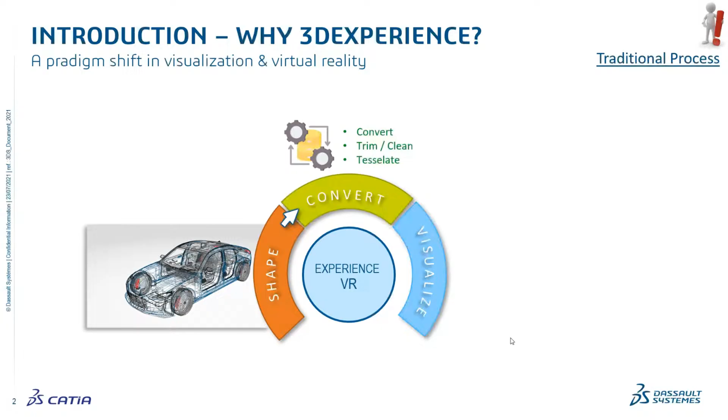So this is a very simple diagram of the traditional process. In the beginning, we have some sort of 3D data coming from a CAD software or modeling package whatsoever, and we want to visualize this data. In order to do that, we need to convert it, which means we need to transfer the data structure from one to another. We need to trim, clean, tessellate. So we need to turn the data into something that the visualization engine can digest. And when this process is done, we can finally visualize our experience in VR.

Then we do our review, we find some issues, information goes upstream back to engineering, design, manufacturing, whatsoever, modifications are made, and the whole process starts over again.

There are a few drawbacks with this approach. First of all, it needs an expert to configure the data conversion part. This is not an easy thing, and it's really tricky to match material stuff and stuff. And if some module in the pipeline changes, say there is an update to some software, it needs to be corrected accordingly. So the process itself can take a very long time to accomplish, depending on the size of the model. If you imagine a complete cruise ship or a passenger plane, it can take hours or even days to be ready for visualization. And consequently, at the time the model is reviewed, it might already be outdated.

And last but not least, usually there are no features taken into account besides geometry and material. So maybe you will also get some cameras and lights, but that's it. And what you get is not even a copy of your original data. It's a dumb model, this is what I call it, or it's a lookalike thing. So it doesn't know its context, it doesn't know its constraints, its kinematics, or any other properties.

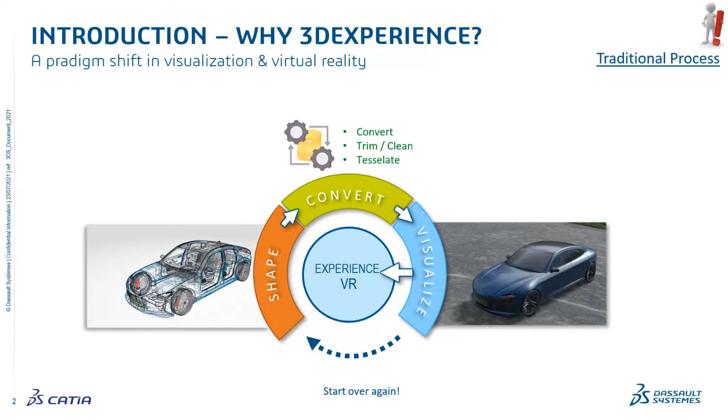This list goes on, and we'll see shortly how we overcome these drawbacks with our integrated approach on the 3DEXPERIENCE platform. But here is how the process looks on the 3DEXPERIENCE platform.

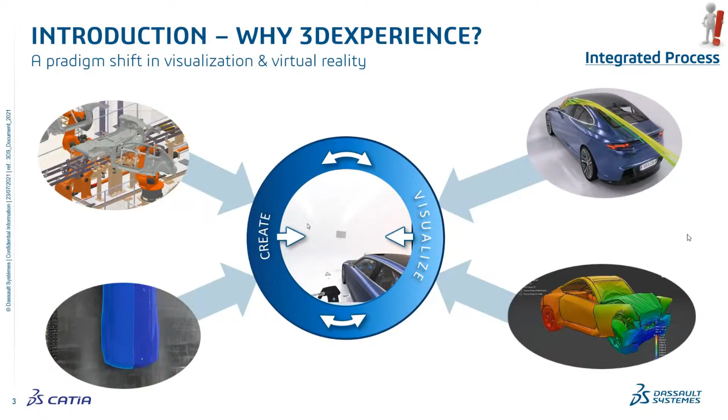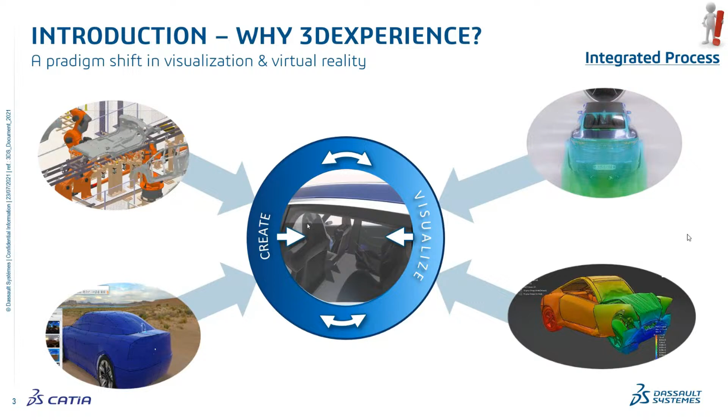No data conversion or special preparation is needed. We can instantly review native data, whether it's CATIA, Delmia, or a Simulia app. XR is built into the very heart of the platform, and it's available in almost every 3D app. And because we're looking at native data, content is not restricted to geometry. It can be kinematics simulation results, or material flow simulation of a factory layout. We can even combine data from different sources into one presentation.

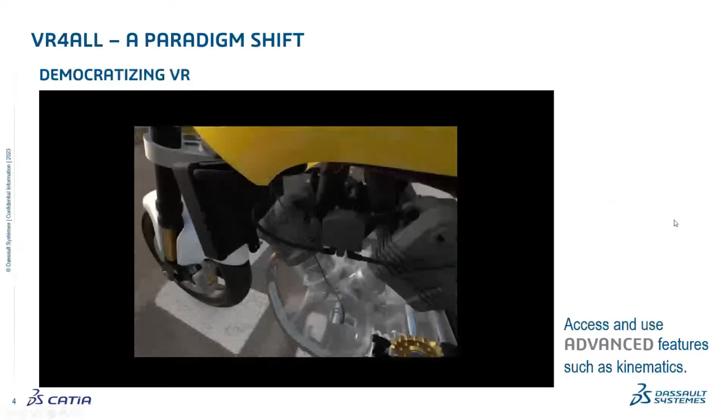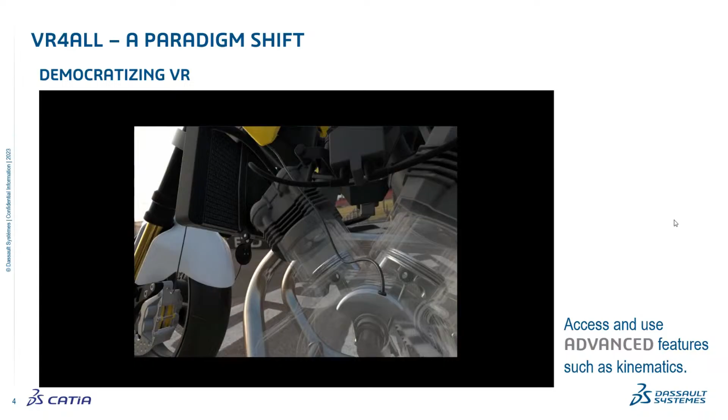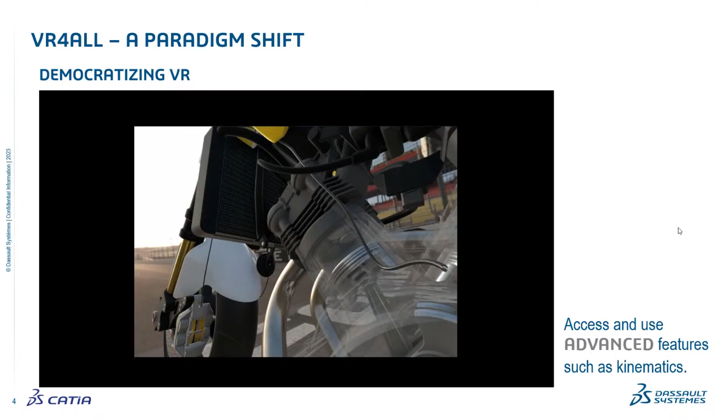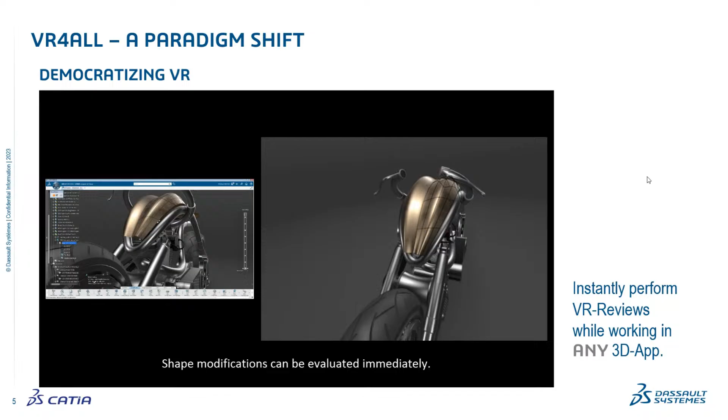See later on, here are some examples. The first one shows native CATIA kinematics in action. Usually with a traditional tool, you need to create these animations, define the constraints, and so forth - lots of work. But here in the 3DEXPERIENCE, we just play the kinematics that were defined by engineering and which are part of the CATIA product. And if you start a VR review, you will experience the current version of your dataset, not an outdated lookalike. You can even modify the data while the session is running, like shown in this video. Here, the surface of the tank of the motorbike is modified, and these modifications are shown in real time in the running VR session.

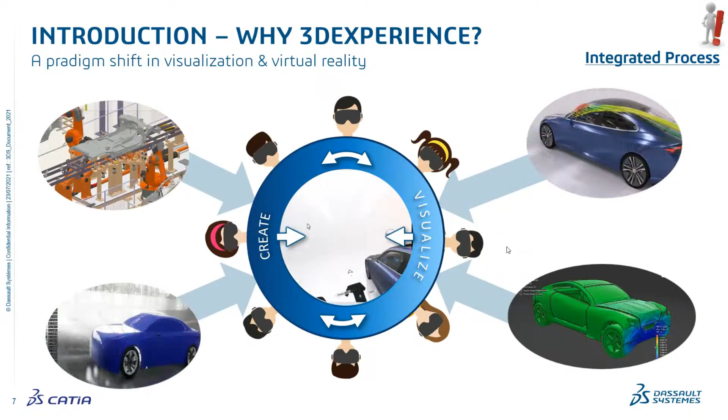And then you mentioned the second advantage earlier - what is this second one? The second advantage is not as obvious, but if you imagine you're using visualization in a larger context, like in a big design studio, it becomes a crucial factor.

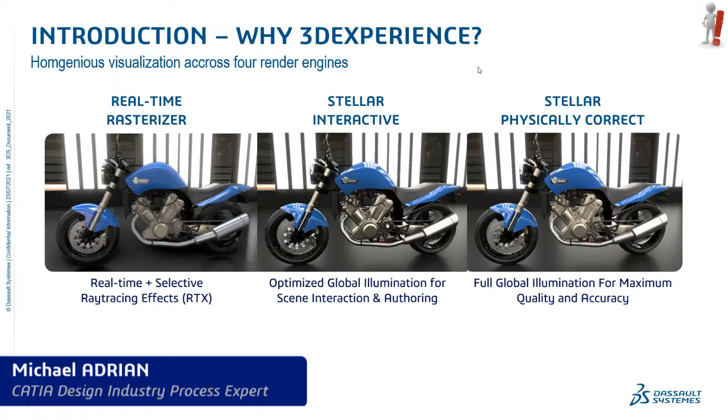It's all about materials and how they are displayed in different render modes or in different render engines. Because even if you load the same material into different tools, it is not guaranteed that its appearance is consistent across these tools. That's because of the way the material is handled internally in the engine. It's a bit like shooting the same image with different cameras - even if you set the same parameters and use the same lens, you will never get the exact same results.

So on 3DEXPERIENCE, as shown in this slide, we have three different render modes, tailored to different use cases. There is the real-time rasterizer for interactive rendering and XR. There is Stellar Interactive for real-time ray tracing for quick examination of lighting, reflections, and refractions. And there is Stellar Physically Correct, or Stellar GI, for high-end ray tracing and global illumination. There's a fourth one, WebGL, for 3D real-time renderings on web-based clients, but this one's not listed here.

And here comes the advantage: not only can you easily activate the render mode that fits your need by a mouse click, but the material model on the 3DEXPERIENCE platform ensures that every user will get a consistent look independent from the currently selected render mode - of course, within the boundaries of what is technically possible in that render mode.

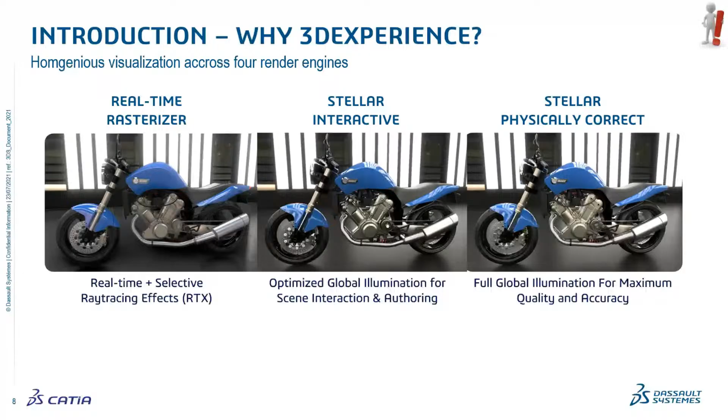Let's see this nice side-by-side comparison where you get Real-Time Rasterizer on the left, Stellar Interactive in the middle, and Stellar GI on the right, the same thing with a moving camera. By the way, the noise you see on the right part of the screen comes from the way it's rendered, because it's ray tracing, and when the camera is moving, the engine just doesn't have enough time to calculate the complete image. But as soon as the camera stops, the AI denoiser kicks in, and the image becomes clear rapidly.

Okay, so these are my two favorite advantages - they are really nice advantages. Also, something really important when it comes to VR and even augmented and mixed reality is headsets. So what HMDs are currently supported on the 3DEXPERIENCE platform? What you see here are the headsets that we support. For VR, the HTC Vive is more or less our reference model.

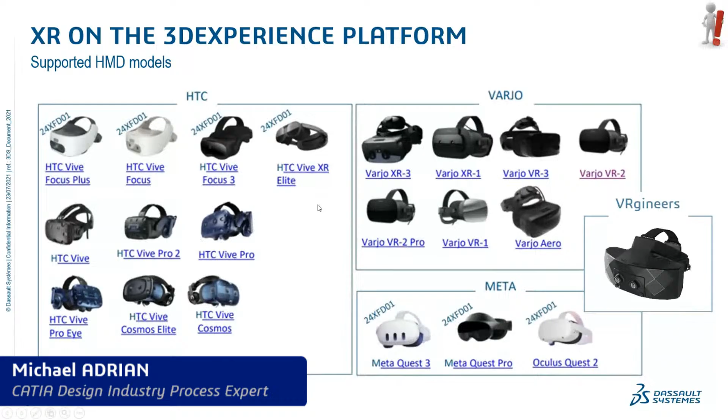And for mixed reality, it's the Varjo XR family. But the other headsets you can see here are also supported. Controllers might work a bit differently, but basically you can use each of these headsets together with HTC, for example with SteamVR, or the MetaQuest with whatever software it uses. I've never used the MetaQuest, but it works in a similar way.

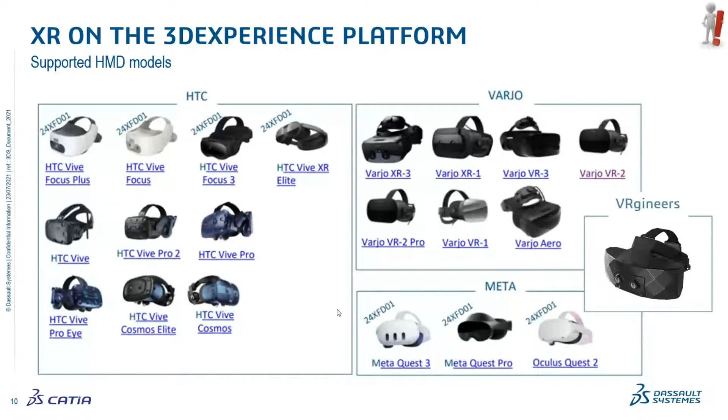So you start your standard VR software, and in parallel you run the 3DEXPERIENCE platform. As long as these headsets talk OpenXR, everything's fine. So that's the current state with HMDs.

Okay, and also I know that some more advanced setups exist, like Powerwall or Cave. Can you say a few words about it?

Yeah, we are supporting Powerwall and Cave setups out of the box with the 3DEXPERIENCE platform. There is no additional software needed.

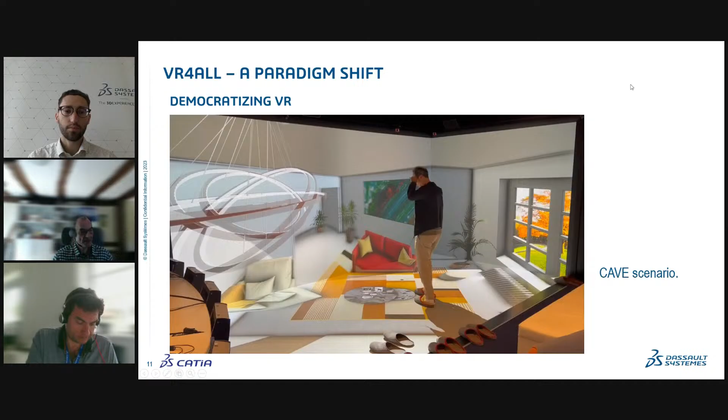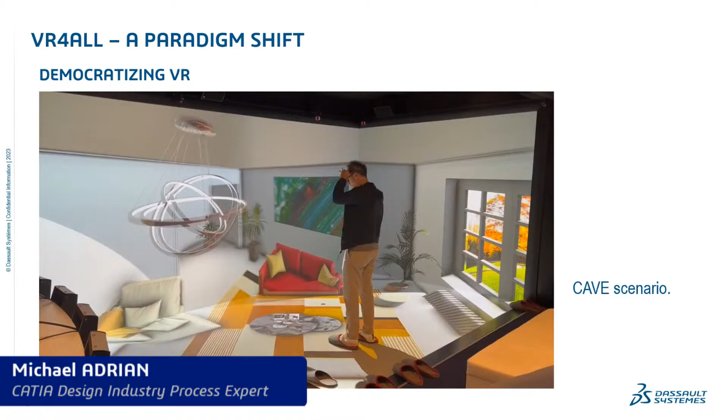Here is a nice little video which was done in the Lives Cave in Vélizy, our headquarters, showing a living room scenario. And again, this is native CATIA data. It's the same as with HMDs. There is no preparation; the only difference is instead of clicking the HMD command icon, you click the Cave command icon.

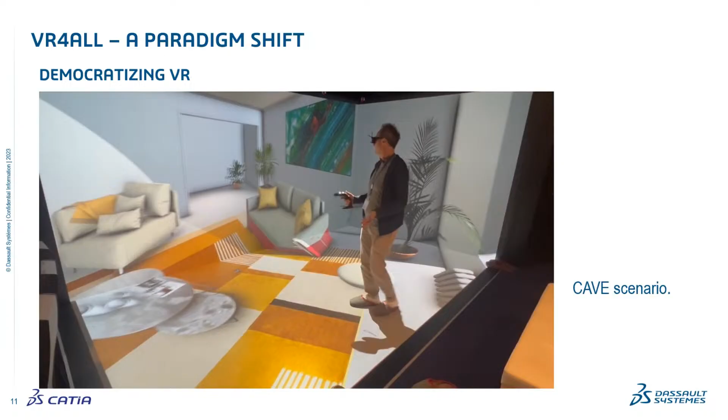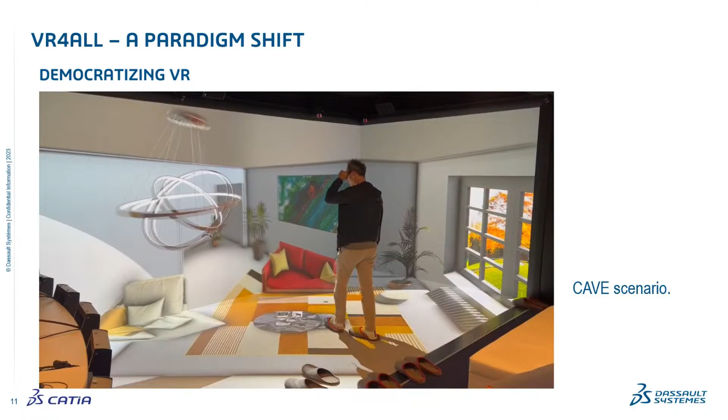Of course, these things need to be configured. It's a bit tricky, always depending on the hardware. This is not plug and play, but we can offer some support for the configuration. So if you have questions about how you can use your setup with 3DEXPERIENCE, please let us know, and we will help you with the configuration.

All right, so thank you for this great overview of VR capabilities. Now maybe let's put it in context. You said you can show us how easily you can use VR in CATIA. So can you show us an example of this usage?

So I prepared a little demo. I don't want to give you a full demo, just want to show how easy it is to start VR. So what you see here is a native CATIA app on the 3DEXPERIENCE platform. In this case, it is CATIA Live Rendering, but again, it can be any 3D client on the 3DEXPERIENCE platform. At the bottom here, you can see there are different tabs offering the features in this app.

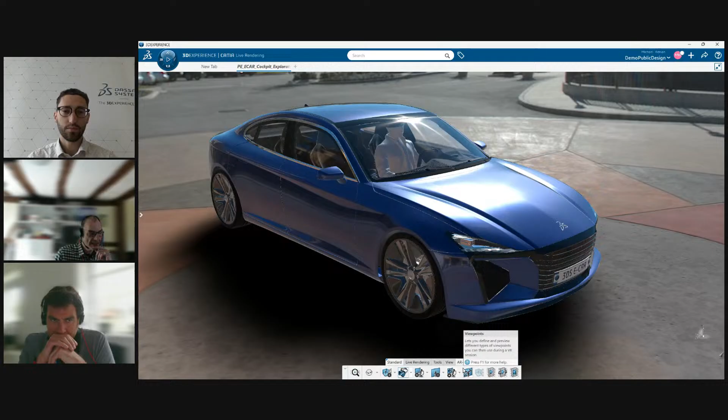And one tab that you have in almost every 3D app is the AR VR button. Here you can see we've got Powerwall, Cave, HMD, and some other scenarios. I want to show you how easy it is to start a VR session.

In order to do this, I need to switch my equipment. I have my XR Elite besides me. Cross your fingers, everything works as planned. Only little problem is I can't talk while I'm wearing the headset, because for whatever reason the microphone doesn't work. So Ugo will talk you through this quick demo while I switch my equipment back in a minute.

All right, so while Michael is doing this VR demo, as he was explaining, we have here a native CATIA model. It's not showing the CATIA tree on the left, but we have the original data with all the mathematics. And as you saw in some videos before, if you do some modeling change, you will get it on screen, but also into your VR headset.

So with the AR VR tab, he goes into HMD configuration, picks the HMD connected, and then the platform will automatically communicate with the headset and with the software providers. Could be SteamVR or Varjo based, depending on the hardware, the headset you use. So then it just activates the HMD commands, and this is what he sees into his headset. You can at the same time see on screen the model and see with a VR view what he's experiencing into VR.

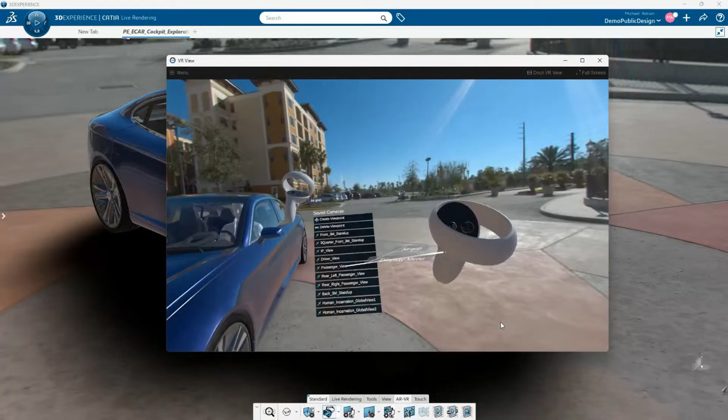The first one is called navigation. We have Product Explorer, but also cameras. So let's see which one he will pick. He starts with cameras. You see here we have predefined cameras that you can configure exactly with the right coordinates.

And this camera can be called on the fly with this interface which is attached to your controllers. So if you want to define a design review while standing beside the car, at the exact position of the driver or the passenger, this is something possible. And then you have this way of exploring.

By the way, if you want an advanced scenario, we can do some seat buck alignment using trackers.

So what you see here is starting to navigate. We have three ways of navigating. The first one is to walk, meaning you keep the same height. But if you use the two controllers, you have also a different way by air grabbing, which means you can rotate, go up, down, or move.

We also have the fly mode, which gives you all the freedom to navigate upward, downward, backward. And beside these controllers, we have this small blue arrow, which shows the direction and orientation you will take. So it's a very easy interface and way of navigating offered into the platform.

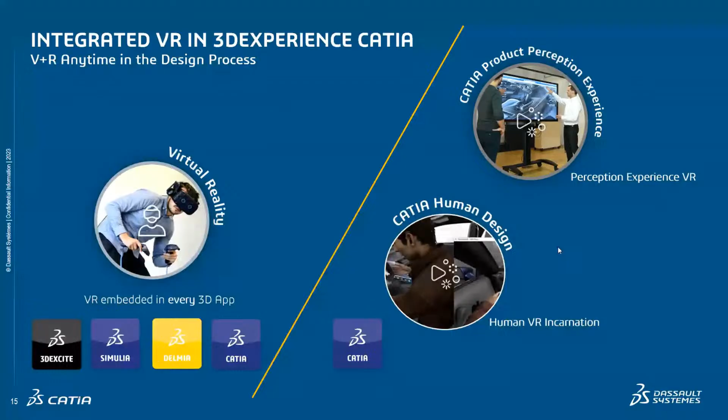Now let's have a look at these specific VR features, like in Human Design or Product Perception Experience. For this, I'll hand over to Ugo Barbalata, who will give you more insights here. Yes, so I guess you can see my screen? Yes, that's good now. Okay, perfect.

So yes, what Michael was explaining, we have this native HMD integration and the classic HMD commands for navigation, Product Explorer, and cameras. But I also want to explain that in CATIA we have some applications with specific VR skill sets. The first one is called CATIA Human Design. With this application, I will show you what we can do on screen, but also in VR.

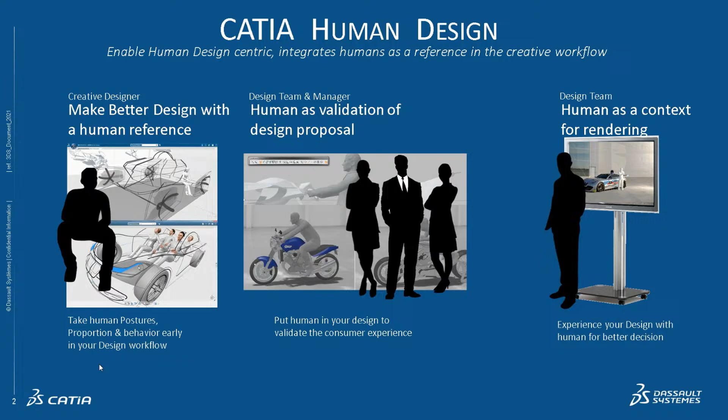We can place virtual humans to give some context around or onto humans, because you can also wear some jewels, a watch, a wearable device, but also you can explore a cockpit, you can explore an interior, so it could also serve for architecture. So what we have first is to create a human.

We have generative humans where you can play with different morphology and ages. So you see with this nice interface, you can quickly create the right humans.

Then you will place him. So you see here we have placed these virtual humans into a car cockpit. On the right, you have the interface where you can have predefined postures, but you can also customize these postures by selecting these cubes.

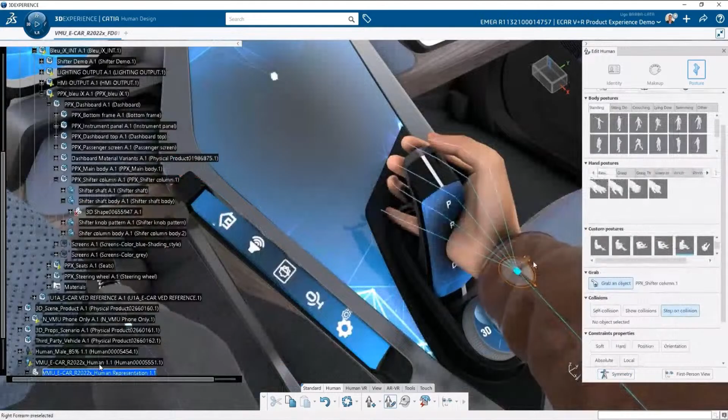So you see here, we can move the bones, we can move these cubes, and we have automatic grab capabilities. We can analyze different postures. With the sliders on the right, you can smoothly move from one posture to another to see how your human is moving.

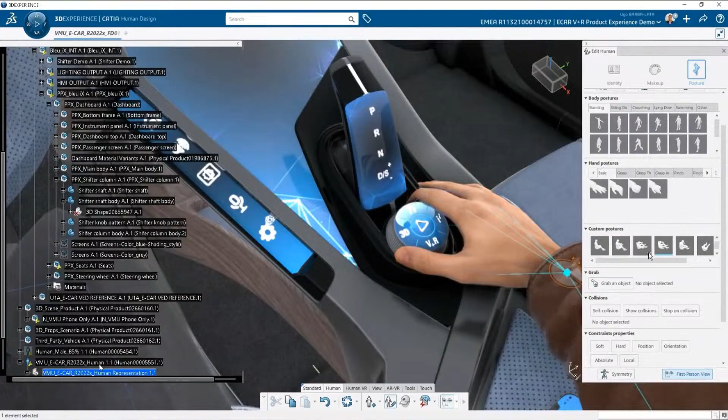And the red shows the intersection with the surrounding, with nearby geometries. You can go into first person view, still play with this smooth transition to see if you can perceive a button, an icon, or objects you have to interact with.

Interacting, you can also have the human follow some predefined kinematics, but you can also grab and move objects. So this is what we can do on screen, but let's check what we can do into VR.

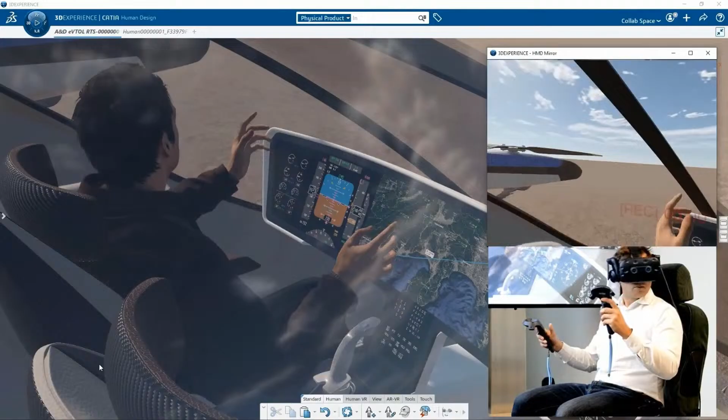With human incarnation VR, with a headset and two controllers, the first thing would be to incarnate the upper body of the human. As you can see on the right, two controllers and one headset, you can explore your surroundings and you have your virtual avatar, meaning you have a representation of a virtual body. You are not lost in your 3D space.

In terms of capabilities, we have grab and move objects. So you see with this highlight, you can reach and grab this object. With the controller, you press the trigger and then you can move objects around. So it's interesting to see if you can reach, if you can move, where you will place objects around you.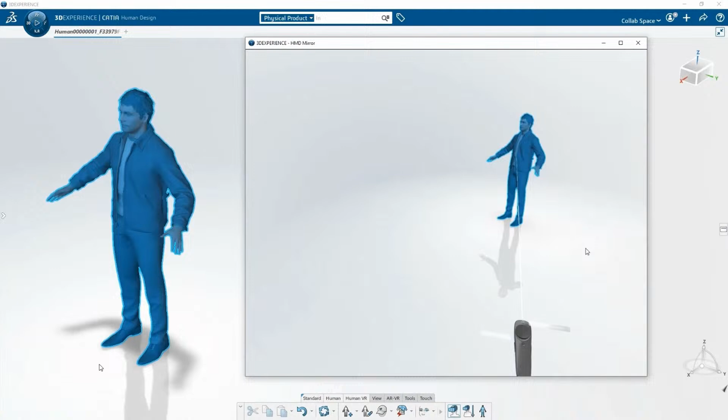If you have multi-trackers, we can have up to 9 trackers on top of your two controllers and your headset. You have this quick way of calibrating, and then you see we fully incarnate the human. So then what you can do by incarnating is have full freedom to move around your virtual geometries.

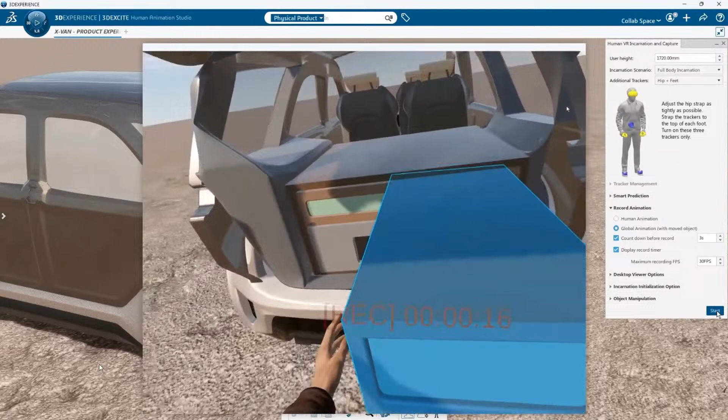Combining with grabbing objects, you can record specific postures, but here we are recording the full body motions, meaning that you can explore. Here is the trunk with objects, and you can start to grab and move objects to see if you have enough space, enough room to operate.

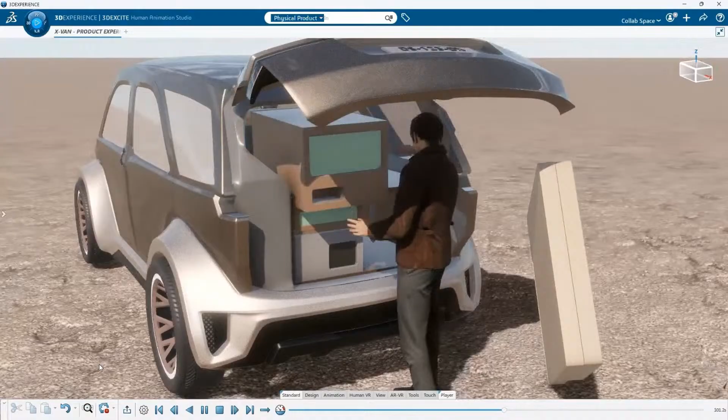And when you have recorded all of this, you stop your VR session, and everything is saved into your CATIA tree. So here, what we see on screen, we have the capabilities and freedom to navigate around and replay what you have recorded - your body motions and the objects you have moved.

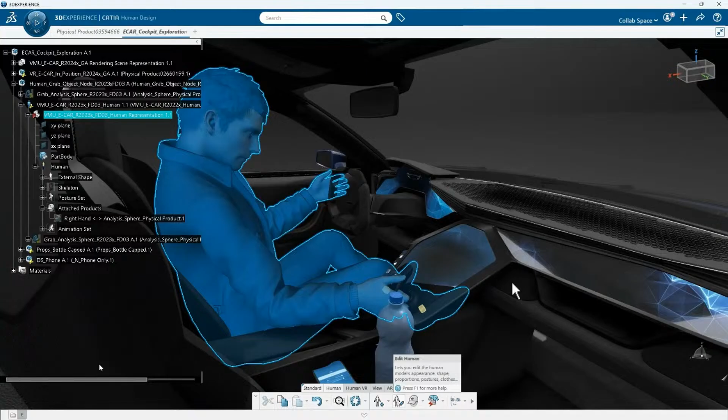It's a way to review how you will incarnate and explore the product you have designed, onto geometry you have designed like minutes ago, because there's no conversions. So here again, on the left in the CATIA tree, the human is an object, and inside you have all the custom postures or the postures you have recorded into VR sessions.

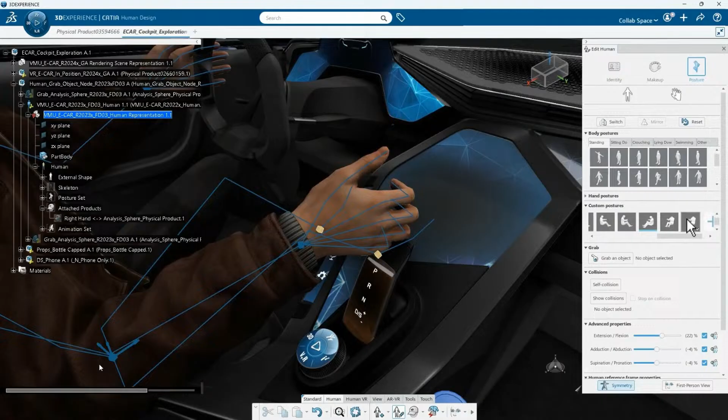You can smoothly play between different postures. And then, again, capabilities to navigate around and get close, meaning that someone will have a natural, immersive experience incarnating a human, and nobody around will disturb him. And then on screen, you can smoothly replay what he has experienced.

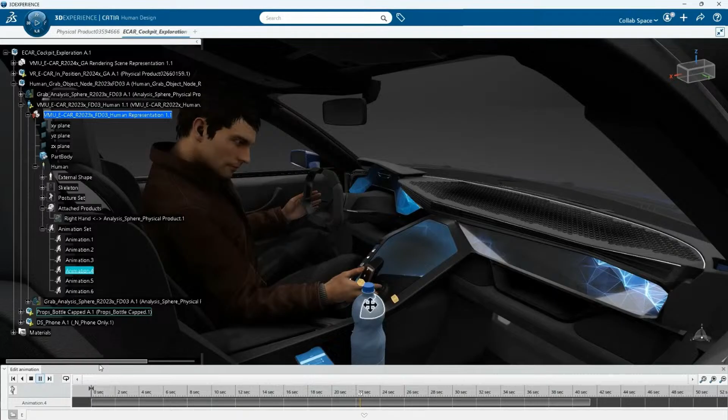When you record an animation, as you can see, we have the animation set on the left, and on the bottom, we have these animation lines. So again, you select the animations you want to review. You just play, you navigate around, and with the timeline, you can move smoothly the arrow, and you can select a specific key, a specific second of your experience, and extract the postures.

So it's interesting that what you did before is not a lost experience. You can record and share with the relevant department in your company. So that was CATIA Human Design.

And the second one I want to detail for you today is Product Perception Experience. This is a real-time experience where you will insert your product and create some variability and exploration of your models. So how does it look on screen?

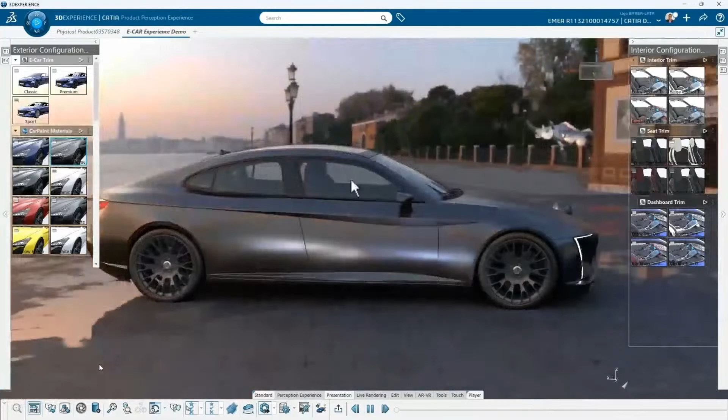You will see we have this very nice interface with some thumbnails. These thumbnails are about variants. So on the left, we have some variants of cameras. We have some packages - a package can trigger some variants of geometries, position of geometries, materials. We also have variants of humans, though it's not shown in this video. So here we have the virtual model.

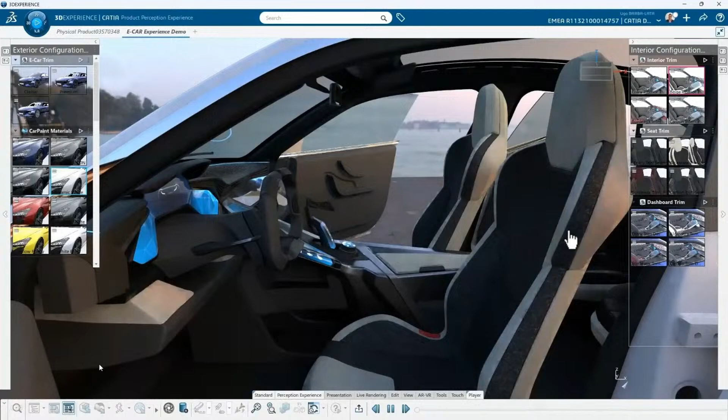And by clicking on objects, I can trigger some kinematics. I can also load some configurations. Using the Stellar real-time engine in this application, I can quickly show different packages of color and trim, selecting the thumbnail, and quickly watch the variability of the product, still with this very nice quality. And with my mouse, I can click on objects to trigger some variants.

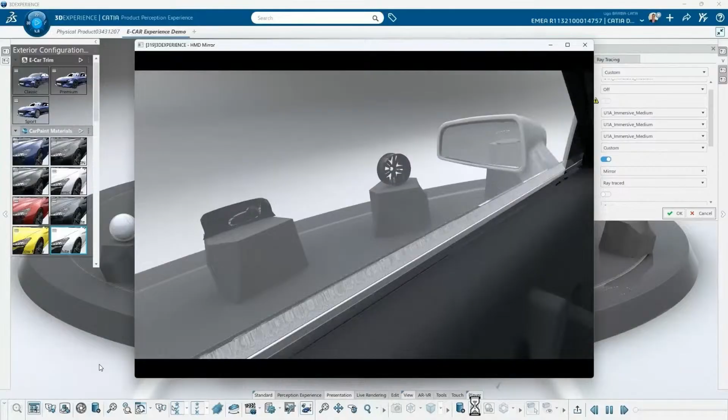But now, how does this translate when you jump into your VR session with your headset? With the feature Perception Experience VR, using the controllers, you have the capabilities to interact with the models. If you have defined an object in your scene, it will be a trigger of a variant. With the controllers, you can pick - so here I'll pick the interior panel of my door and close it. By the way, you see we have real-time reflections, meaning combining all the Stellar real-time capabilities into your headset.

You have a way to experience and explore and review your models. What you saw before was highlighting the triggers, meaning you give the headset to someone, and he can highlight objects which he can interact with to switch variants.

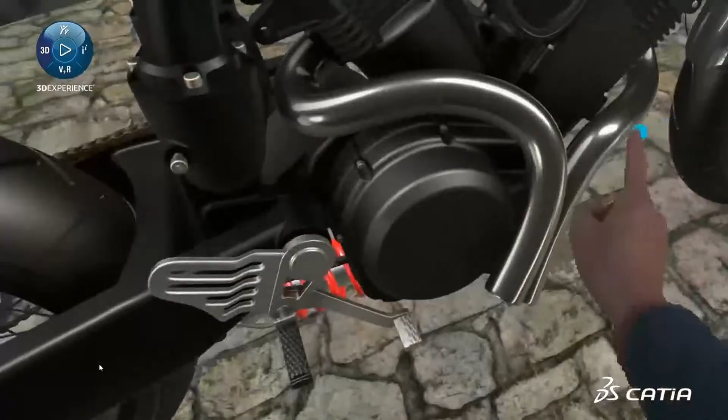You can do this with your controllers, but of course, thanks to mixed reality and hand tracking capabilities, with your finger you can select objects. So here I've defined this object to switch car paints, and this one to quickly check some different exhaust variants.

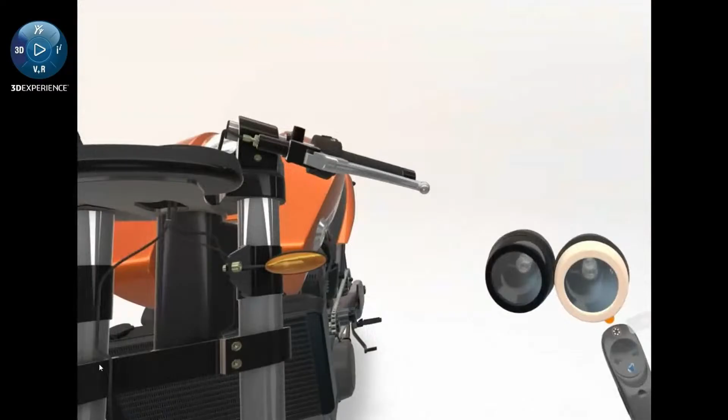You also have the capabilities to move objects. So into your experience, you define the objects you want to trigger, to use, and to move. With the controllers, you see, you get close, they will be highlighted in orange, and then you can select them one by one and move them.

What you do with your controller, of course, you can also select with your hands. So if you get your controllers away from your HMD, the headset will detect your fingers, and with these two spheres you will pick and move objects smoothly. So again, everything you do with controllers can be done with your finger.

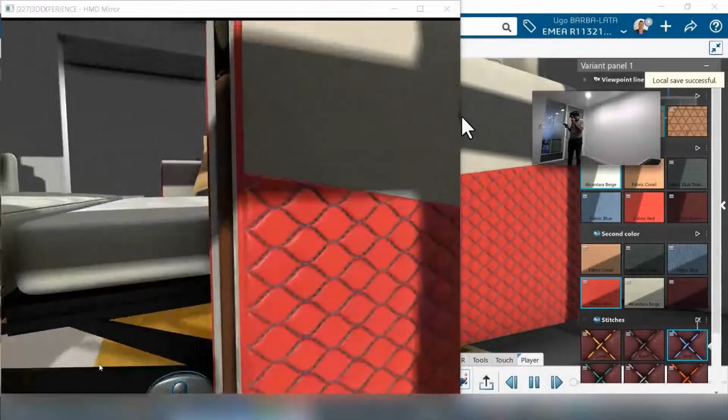A last thing which is very interesting: if you are exploring, you can capture a viewpoint. If you have a viewpoint you want to share, to render later, if you want to produce an image, you can create a viewpoint, or you can also create a stage. So you will toggle through different variant hypotheses. Here we are playing with geometries, with stitch colors and fabrics, and then you capture your stage.

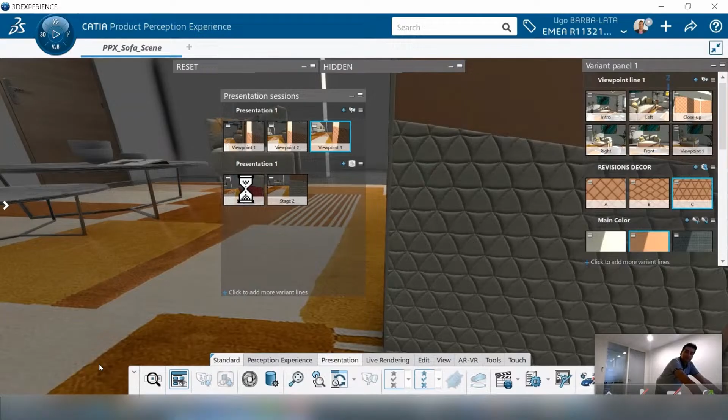When you stop your VR sessions, this new window will show up. You have the viewpoint you have created, but also the stage, which is reflecting a configuration you have defined during your VR experience. Meaning you can, with your headset, define the configuration you want to pick and share later.

So it was the two applications I wanted to explain you, CATIA Human Design and Product Perception Experience, to explain you the strengths and value we have in virtual reality in the 3DEXPERIENCE platform CATIA. What Michael explained, we don't have to data prep, optimize, decimate, tessellate geometries. We don't have to play with lighting and decrease the quality of our materials.

You press the HMD command anytime you jump into VR. It's embedded, it's a one-click solution, as he demonstrated during the VR live sessions. We are flexible to a lot of hardware and devices, flexible to a lot of graphic cards, flexible to laptop, desktop.

So what it means is you have one single product that you can share into your company, and this is the hardware which will be flexible to display and get you a decent and good performance immersive experience. You don't have to get crazy hardware or decrease the quality of your models. And as Michael explained, we support many HMDs on the market. So this is the strength and value we wanted to share with you today.